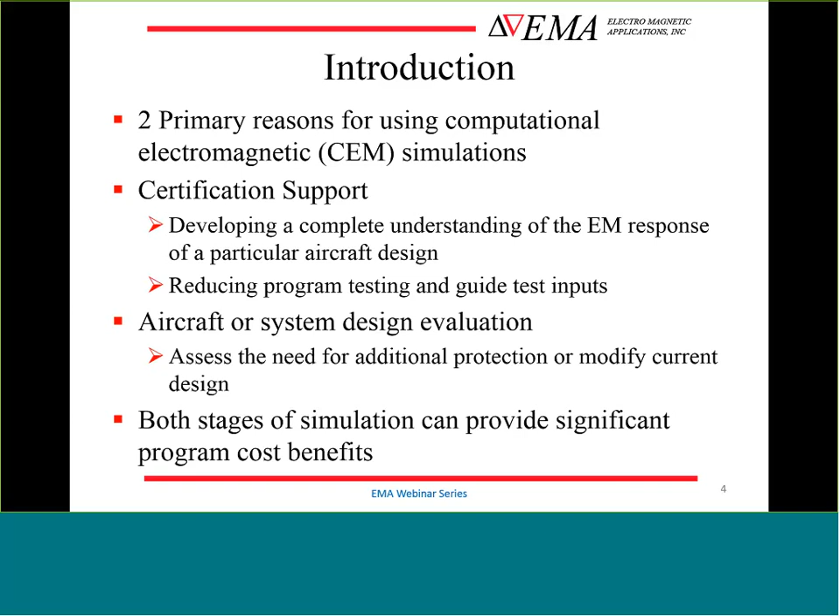So when we talk about lightning effects, it's typically broken up into two categories, either direct effects or indirect effects. Direct effects relate directly to the physical damage of the vehicle or system, and it's often verified by representative coupon tests. The items included in direct effects are the melting or burning of attachment points, resistive temperature rise, magnetic force effects, acoustic shock waves, arcing and sparking at bonds, hinges, or joints, and the ignition of vapors within fuel tanks.

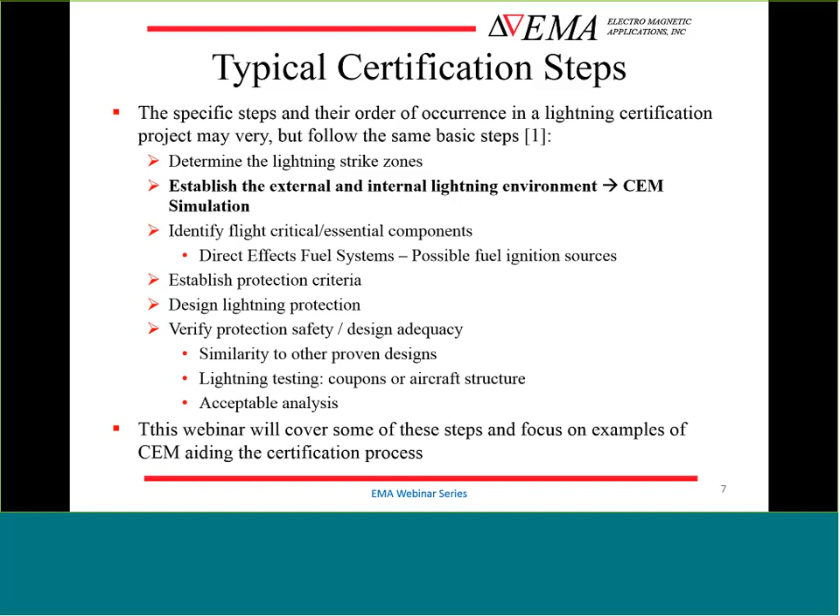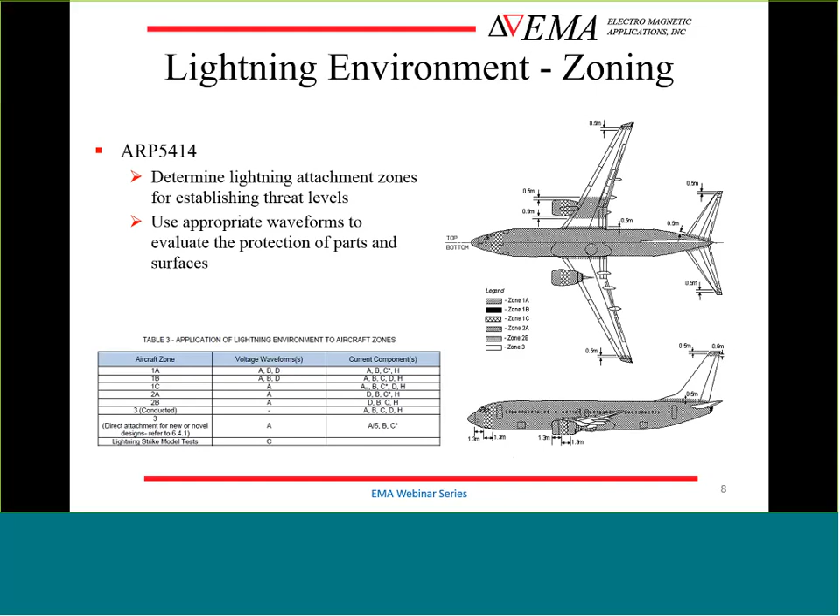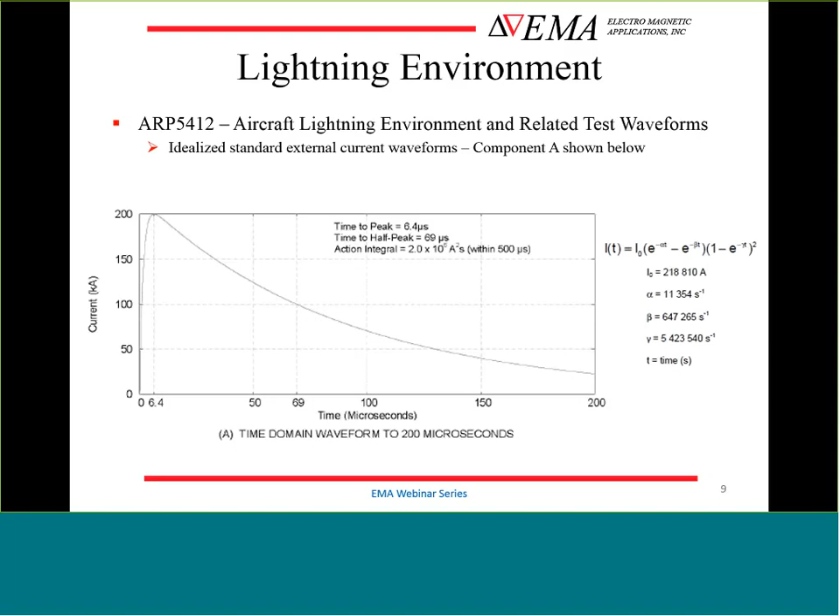So when doing computations, there are many different simulation techniques and many different software tools available. The IEEE standard 1597.2 is a very good reference. It has sections that discuss all of these different simulation techniques as well as many others, and helps guide you on which simulation technique is appropriate for your particular problem, as you would want to use a particular technique depending on the problem that you're trying to solve.

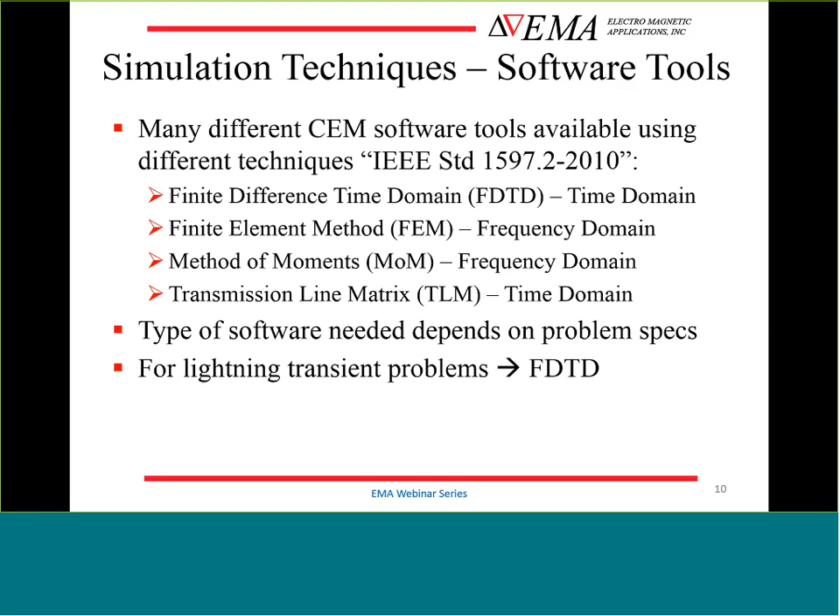And it turns out for lightning transient problems that the finite difference time domain technique is well suited for that. What we use is EMA3D, which is the software that we have maintained for the last 30 years. It is very mature and very well suited to solve lightning interaction problems for complex and inhomogeneous aerospace applications.

Some of the benefits are that it can capture the electromagnetic details of an entire aerospace or ground system down to individual electronic interfaces. We can resolve pin details for full aircrafts or large ground systems, and we do that with an integrated MHARNESS program. It is a transmission line solver that we co-simulate with our 3D model, and we do that to accurately capture the individual pins at the interface level.

This EMA3D also has some very valuable computational speed-up techniques. Parallel processing is available both on Windows and Linux machines, and we have a permittivity scaling feature that we can increase the permittivity in a problem space in a gradual manner so that it does not perturb the solutions of lightning transients. When we combine these two speed-up techniques, we can get factors of up to 100 times for our simulations, which in the case of lightning, when you have large-scale problems and you need to run them out for a relatively long time, hundreds of microseconds, this speed-up is of great benefit.

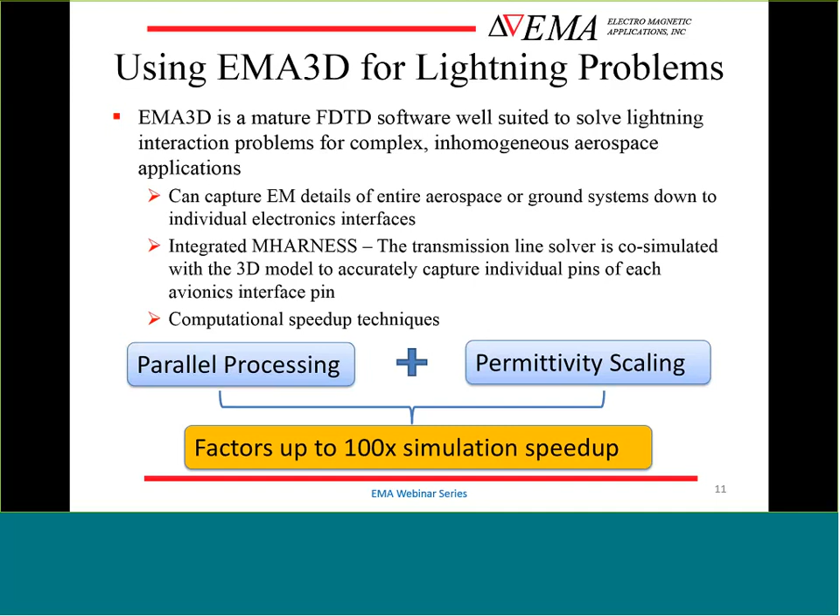So in that IEEE standard, there are discussions about CEM validation techniques. If you read through that document, you'll find that there is no actual standard that specifically qualifies CEM simulations for lightning interaction problems. It has a lot of useful information, but it's more geared towards EMC applications, and it typically uses the feature selective validation, FSV approach, which requires a Fourier transform into the frequency domain, and it's not really well suited for lightning transient problems.

But there is an overall validation approach outlined in that document that does apply to lightning interaction problems, and that's where you have to go through three levels of model validation. Level 1 is the mathematical level, where you evaluate your computational technique: is the method I'm using, finite difference time domain, FEM, method of moments, whatever it is, correct? Step 2 is the implementation level: does the code or software I'm using accurately solve Maxwell's equations? Level 3 is the model level, where you do specific model validation. Are the parameters, assumptions, and setup for your particular problem appropriate to solve the intended problem?

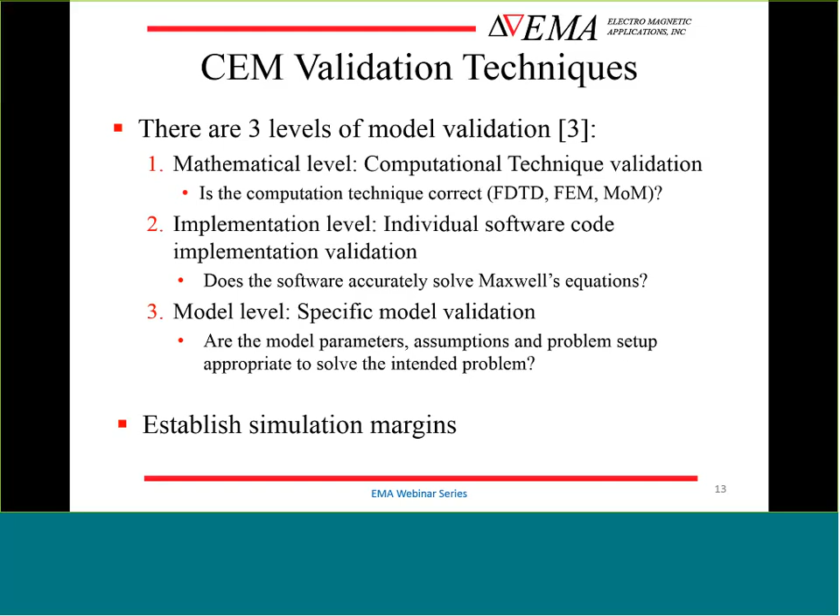You also have to establish margins associated with this validation. Anytime you do a validation, you'll need margins applied to your results as a sort of safety margin. Some approaches for validating CEM for lightning transients are, as we've done in this work and others have done elsewhere, to compare peak magnitudes in a dB scale and also look at the similarity of waveforms. This uses a peak magnitude comparison and a visual inspection of the waveforms for correlation purposes.

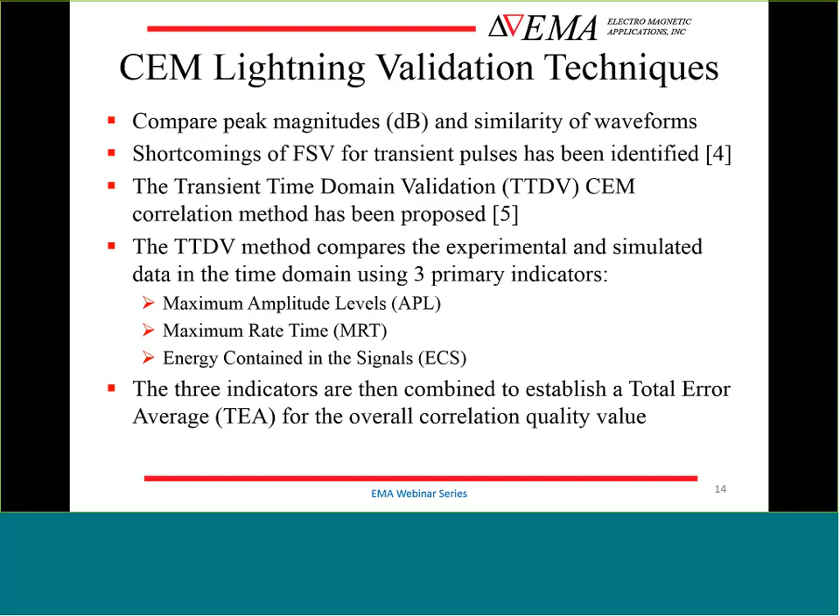There are some publications available that outline the shortcomings of the FSV method for transient pulses. If you're interested in those, you can contact me and I'll give you that information after the webinar. Basically, they propose a new validation technique called the transient time domain validation technique, and to me it seems like a very good approach. I have not yet tried it, but it's an interesting alternative to just peak magnitude comparison or the FSV method. It compares the experimental and simulated data in the time domain, using three primary indicators: the maximum amplitude level, the maximum rate time, and the energy contained in the signals. The approach combines these three indicators to establish a total error average to get a quantifiable value to evaluate your overall validation.

So margin development is a very important part of the validation process. With every effort, you must validate or determine the accuracy of your simulations, and oftentimes this is done through an experimental comparison.

Important to keep in mind, especially for lightning problems, that it may be difficult to apply a single margin to simulation results for an entire aircraft. Sometimes the probe correlation will depend on the magnitude and coupling mechanism of that particular probe. If you're looking at different areas, you may have different coupling mechanisms. If you have wires routed on the trailing edge side of your aircraft, you may have inductive coupling when your control surfaces, flaps are down and spoilers are up. Magnetic fields can directly couple into those cables, and you may have a dominant inductive or magnetic field coupling. If you have wires inside your leading edge or pipes inside your fuel tank, diffusion or resistive distribution may be the dominant levels. So depending on the type of probe and the dominant coupling mechanism, you can get very different correlations between your simulations and experiment.

When you're looking at fields on the outside of your vehicle, you can typically get very good accuracy with your simulations, often within 3 dB of an experimental measurement. When you look at currents inside metallic structures, like inside a leading edge, these magnitudes can be very small, often less than 0.1% of your injected current, and you can have differences between your simulation and experiment greater than 10 dB. But in these cases, you can still consider that a good correlation because the simulation is predicting small currents at those locations, even though the exact amplitudes and waveforms may have some discrepancies.

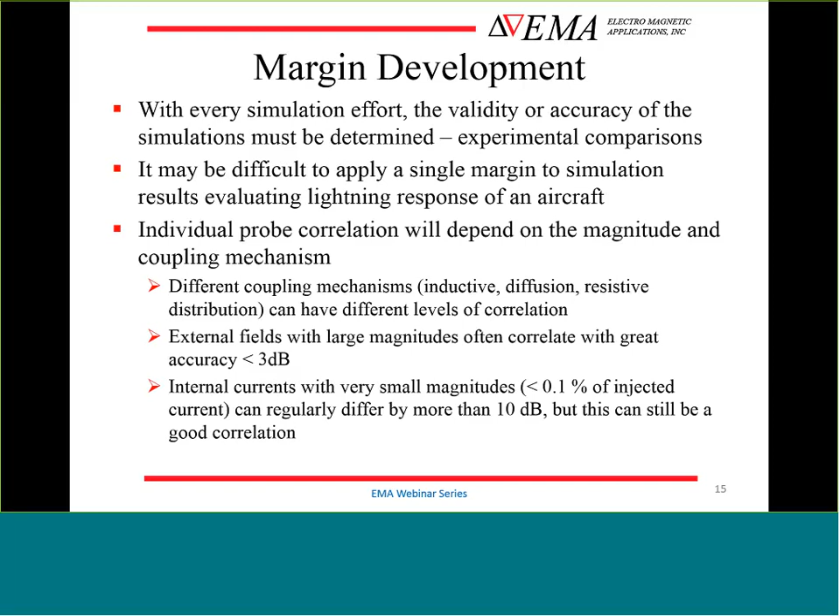One important note in the IEEE standard for CEM validation is some comments about experimental data. Oftentimes the repeatability and accuracy of measurements are very important. It's important to keep in mind that for EMI or EMC problems, measurements can have uncertainties as well, and that experiments can be wrong just like simulations can be wrong. It's necessary to avoid what they call a measurement bias.

In my experience, it seems to work best for the validation and analysis effort when testing and simulation are used together to understand all aspects of the lightning coupling to your particular vehicle. There are things you can quantify experimentally that you can use in your simulation inputs, and things you can understand in your simulation that can help guide your testing program. That's an important aspect to keep in mind.

One example of margin development for a recent certification project is for the A350. In that program, they used an extensive amount of finite difference time domain simulations to evaluate conducted currents throughout the structure of the A350, and they applied safety margins to these simulations based on a sliding scale depending on the current level. This publication was released at the most recent ICOLSE conference in Toulouse, France.

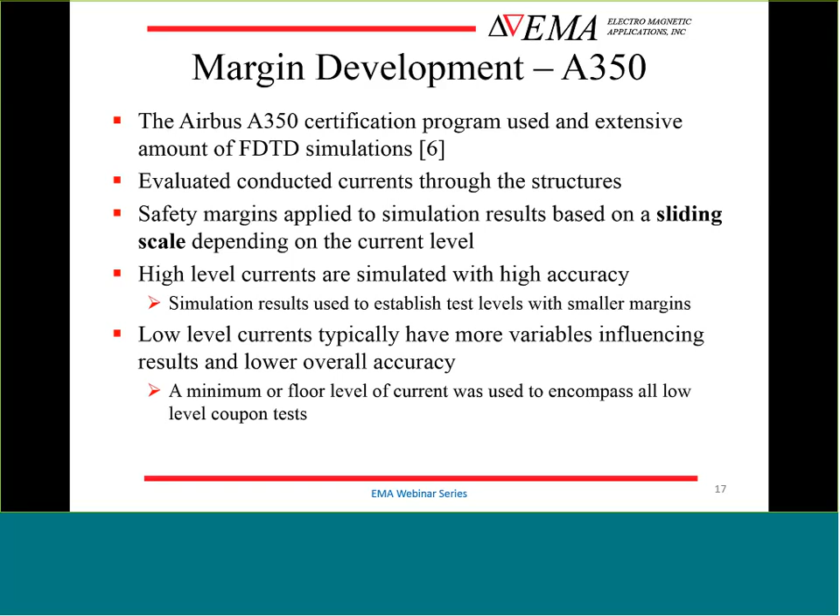Now we'll move on to some examples of where CEM has been used in certification projects.

EMA3D was used on one of the first composite fuel tanks, for the Saab Gripen fighter. The image shown on the right is a wing box test box, with carbon fiber upper and lower skins. The results of this analysis are published in both ARP 5415, which covers indirect effects of lightning, and in the Lightning Protection of Aircraft book. For this case they did a peak magnitudes comparison, and some of those results are shown in the table on the lower left-hand side. Overall, you see very similar magnitudes between the measured and calculated values.

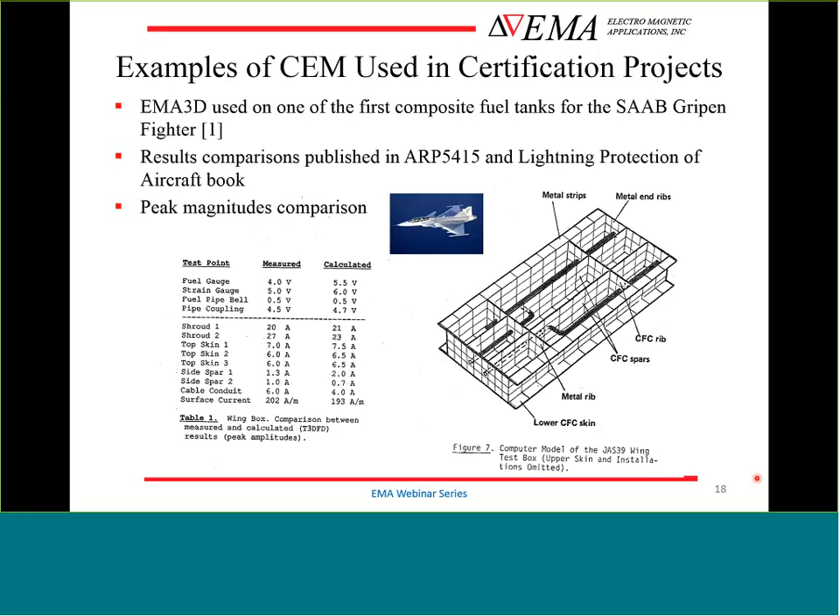Another example is the MD80 program, where they used simulations compared to test data to help certify the MD90 by simulation. There was a lot of similarity between the two designs, so they were able to use a lot of simulation to bypass testing, using a combination of similarity and analysis to go through their certification process.

You can see a sample waveform in the lower left, and in the lower right table you can see some of the ranges for variation from measured values. So they were getting comparisons between simulation and experiment, typically within 15%.

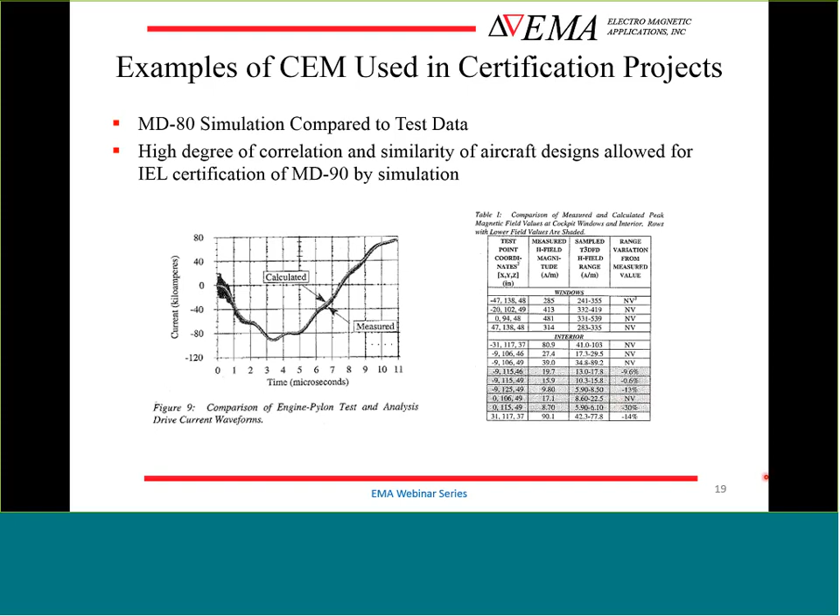A more recent example is for the Mitsubishi Regional Jet. They have been using EMA3D, and published results for a test box, an aluminum wing test box, with a dramatic successful correlation between experiment and simulation for many probes. Within that publication, they show results displayed here as surface magnetic fields at locations P1 and P2, showing very good correlation between the simulated and experimental values. This is in line with what we have said before about accuracy of simulation for external fields - it's typically very, very good at predicting external fields.

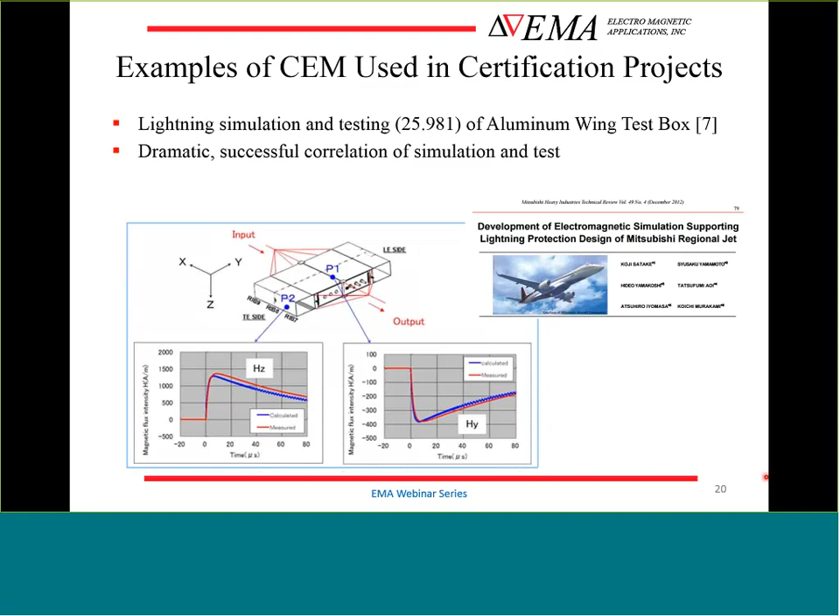Now we are ready to move on to the primary topic of this webinar, the recent validations in an aircraft certification program. It was an experimental lightning program conducted on an aircraft wing test box, similar to the other two test boxes we've reviewed so far, but also simulations and experiments were performed on a full commercial aircraft that was primarily composed of CFRP materials for the wings.

EMA3D was used for all of the simulations. Comparisons were made between these results to validate the numerical techniques and parameters, and in general we see an excellent overall comparison in both magnitudes and wave shapes, which we will go through in some detail. These results for both the test box case and the full aircraft comparisons were presented at this year's International Conference on Lightning and Static Electricity, the ICOLSE conference in Toulouse, France.

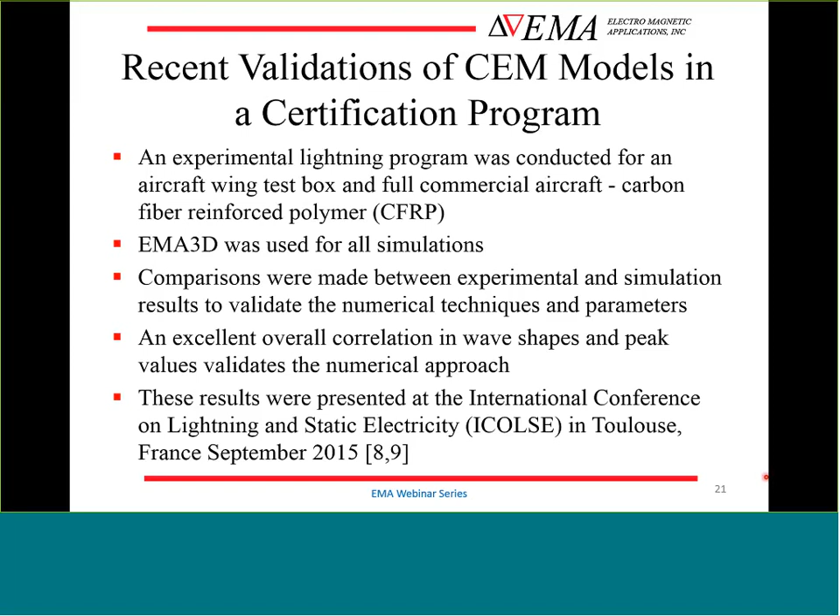So this was outlined earlier, but we'll walk through it again. It's important to set up a plan for incorporating your simulations into your certification program. It's best to establish this plan early and account for necessary validations of your simulations. In this particular program, it was very useful to have engineering development tests, which we'll talk about shortly.

We have done test and simulation on a wingbox, which seems to be fairly common practice between different certification programs, using an intermediate item of intermediate complexity between panel testing or full structure testing. We'll go through the test and simulation of the full aircraft, and talk about how simulations are used after you have a validated model, and how these are done for the final in-flight aircraft. This is used to establish your coupon threat levels, and then we'll briefly discuss coupon testing.

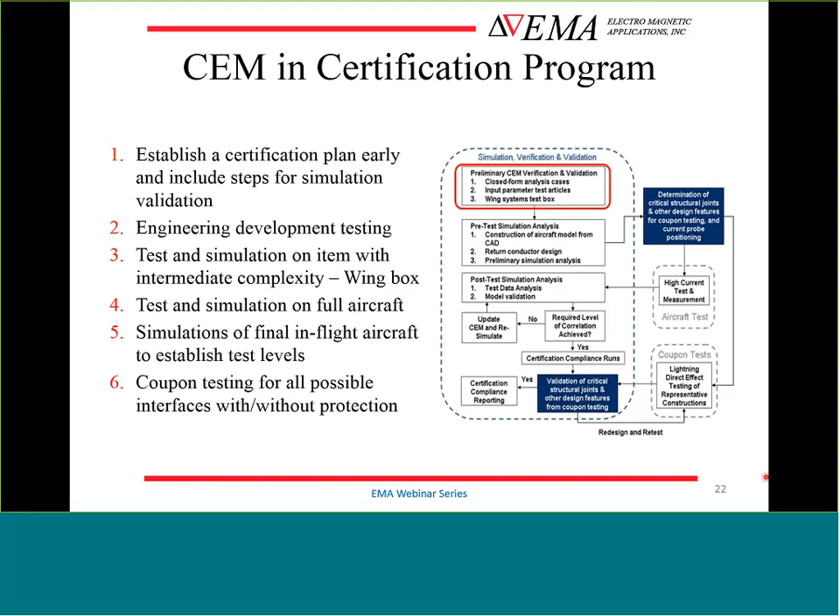So the initial aspect of this, there's numbering associated with these different steps, and the numbers are correlated here for the titles. One of the initial steps is to do some engineering development tests and simulations. For this particular program, a large number of samples were investigated, and we used those samples to identify many critical modeling features that we would incorporate into both the wing test box and full aircraft models.

Some of those critical features include the conductivities of CFRP and ECF. They are anisotropic by nature, both CFRP and ECF, and we used an extensive number of samples to test and then simulate, to compare and understand what conductivities are necessary to accurately simulate current distribution on the particular CFRP and ECF panels in this design. This was done for bare CFRP, plain ECF, and the combination of CFRP with multiple grades of ECF.

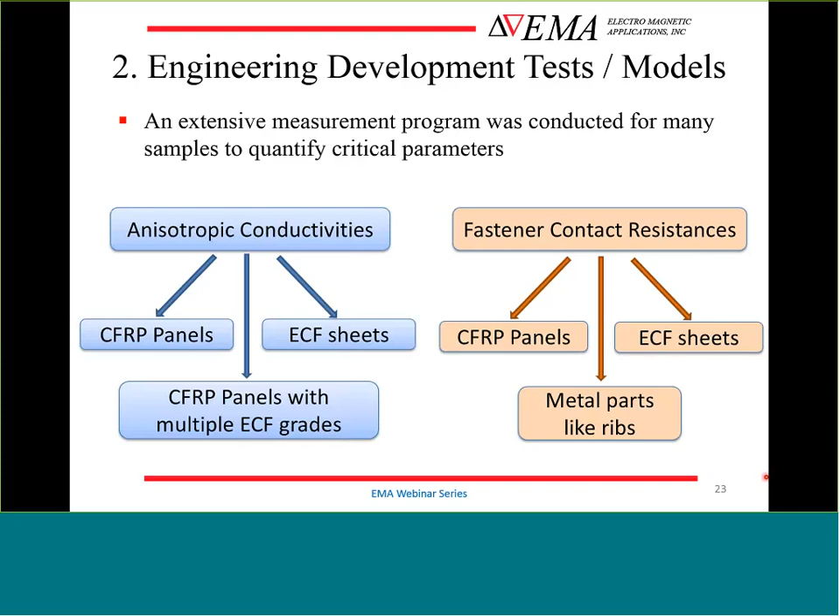Another critical modeling feature is the contact resistance of fasteners. In the models we put together for this project, we consider the contribution of every fastener to the current distribution. Oftentimes they are combined to form parallel resistances, and we incorporate that into the models. To determine accurate values, an extensive number of samples were tested, looking at the contact resistance between CFRP panels and fasteners, fasteners in ECF, and fasteners to metal-like components, be it titanium or aluminum depending on the area. As you might expect, there's a wide range of contact resistances depending on the fastener types, installation techniques, and the materials they're connecting to.

So here's an example of a modeling technique established based on some of these initial engineering development tests. Carbon fiber panels are typically a stack of individual carbon plies. These plies are often separated by tens of micrometers, and you stack them one on top of the other to get several millimeters thickness of carbon, depending on your application. When using finite difference time domain technique, you cannot resolve the individual layers of the carbon, especially when using something like a 20 millimeter mesh.

So we developed a technique where we take a stack, illustrated on the left-hand side as the actual configuration. This is representative of a heavy ECF layer, a light ECF layer, and many different CFRP layers, all stacked together, penetrated by a fastener which connects to some structure beneath that panel, be it the metallic rib or composite spar. The technique we use for this configuration is shown on the right-hand side, where we reduce that entire stack of materials into a single representative surface that we can apply anisotropic or isotropic properties to, to represent the entire stack of materials.

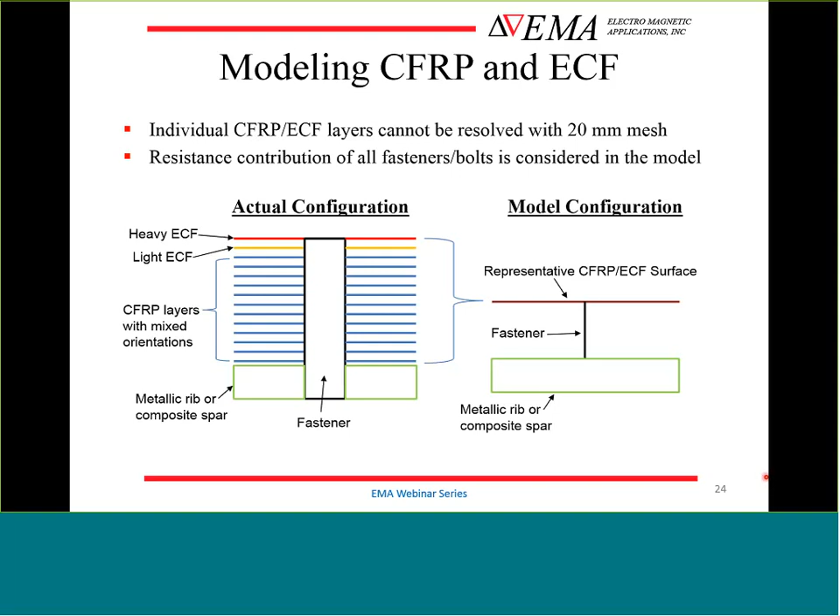So a very important aspect of modeling or understanding vehicles with carbon fiber is that, as we've already said, the carbon fiber is anisotropic by nature. When modeling simple panels, or a test box that aligns very well with the principal coordinate axes, it's quite easy to apply anisotropic properties to those. But it is very difficult to apply anisotropic materials to a complex curvature, such as occurs in real aircraft wings, based on the staircasing, skewed orientation with three principal axes, and curvature. It's not straightforward or simple to apply anisotropic materials.

So one of the goals of this effort is to use the test box to evaluate numerically whether or not isotropic surfaces can be used for the full aircraft. Two different models were created for this test box: one that uses anisotropic representations for all of the CFRP and ECF materials, reflective of the actual material properties, and then another to see if we could use an isotropic representation, where we average values or do some weighted average to estimate isotropic behavior of those materials.

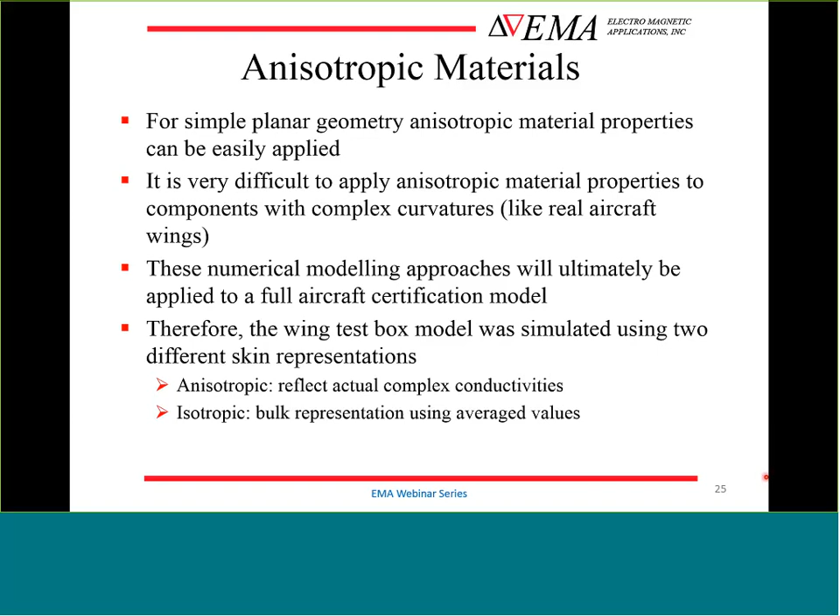So now we're on to the test box model. It is a representative section of the actual aircraft wing. It contains 5 rib bays, as you can see on the right. It was constructed by Bombardier using production-type materials and construction methods.

The skins and spars are of CFRP material, and multiple grades of ECF were used in the design. There are access panels on the lower side, which is typical for aircraft maintenance and wings. Two types of systems were installed in a representative manner: there were 2 cable bundles that each had 5 wires, routed throughout the different rib bays, and 1 hydraulic pipe was routed through the center of the box.

To try and represent some of the metallic features associated or connected to the composite structure, they have a metallic leading edge provided here, and there's also a strip of metal provided along the trailing edge, which they call the lightning diverter strip, mounted to this trailing edge spar along this location.

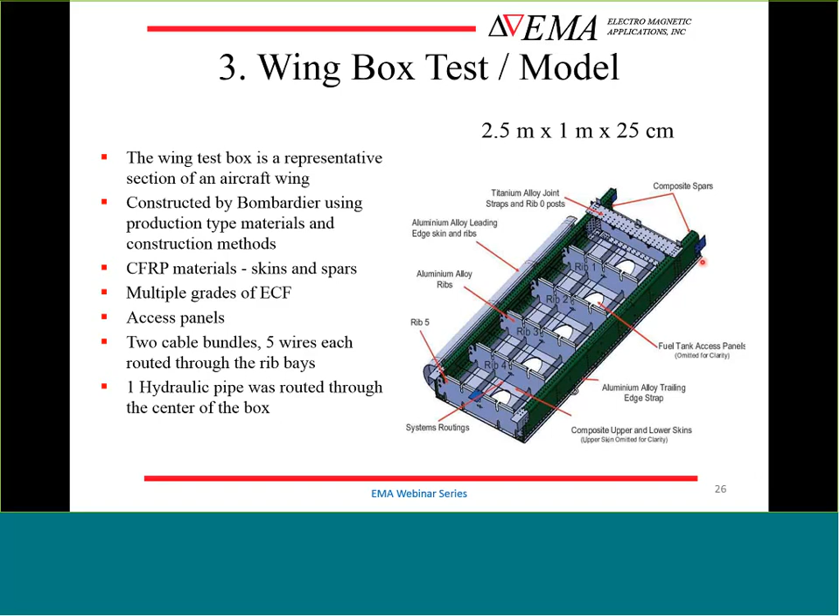Within the model we used MHARNESS to represent the wire bundles. We are able to include termination resistances and resolve the individual conductors by using MHARNESS. And 2 different configurations were explored.

One configuration looked at current measurements on these wires so that both ends of the wires were connected to structure, and another examined voltage measurements, so the wires were left connected at one end and open at the other end to measure a voltage between the end of that wire and a nearby rib.

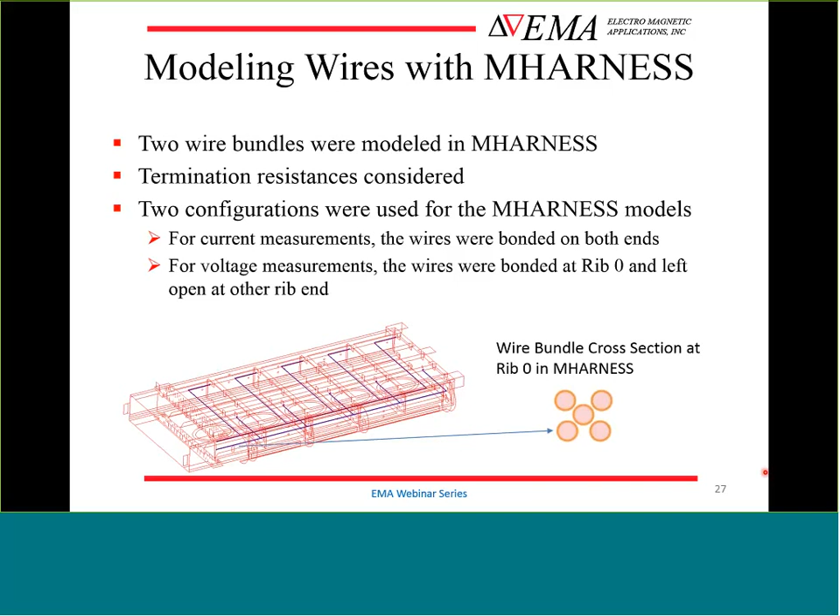For the experimental setup, a return conductor system, an RCS, comprising metal sheets, was built around the test box to negate facility effects, and a component A type waveform was used for injection purposes. The amplitudes ranged from 2.6 to 10.4 kiloamps.

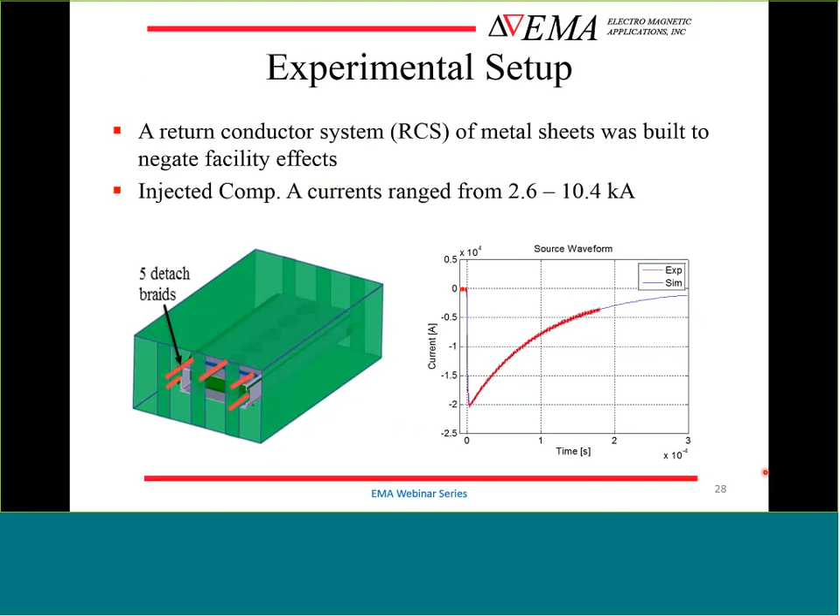There was a case where current was injected onto the upper trailing edge side of the box and detached through the middle leading edge side, creating a different current distribution pattern where current had to make its way across the carbon fiber ECF panels in order to get to the exit point.

There were also 2 fastener injection cases explored at 2 different fasteners on the lower end of the test box, with a distributed detach for both of those cases.

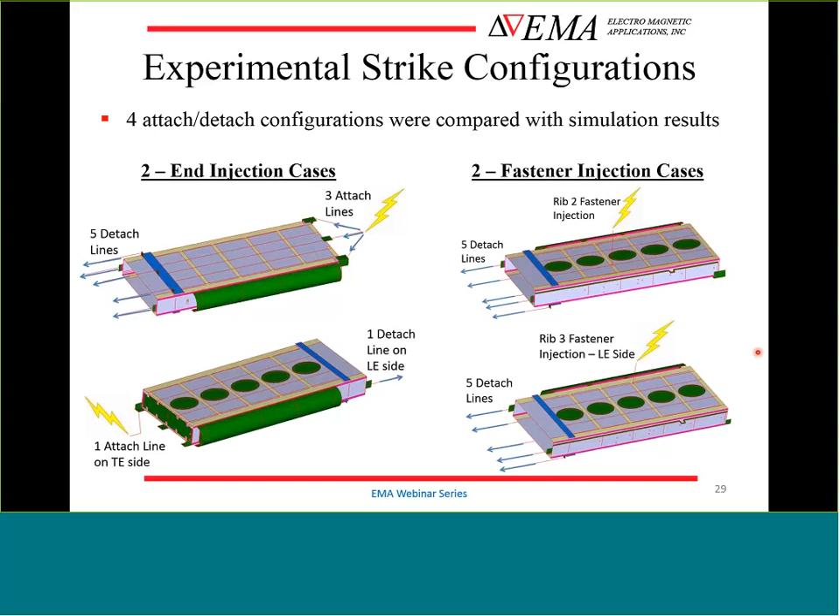So now we're going to look at some of the results and validation that was done. We approached it with a direct comparison correlation technique, where we do a comparison of the peak amplitudes of the waveforms and an inspection of the waveform shapes.

We did some comparisons of T1 and T2, where T1 is the time that the peak magnitude occurs, and T2 is the time where the waveform is at half of that peak value.

In order to compare all of the results, we scaled the values to 20 kiloamps. You saw before that the injections ranged from 2 to 10 kiloamps. In order to compare them, we scaled all of the results to 20 kiloamps, and some of the margins can be established in this way by looking at a scatterplot comparison, which we have on the following slide.

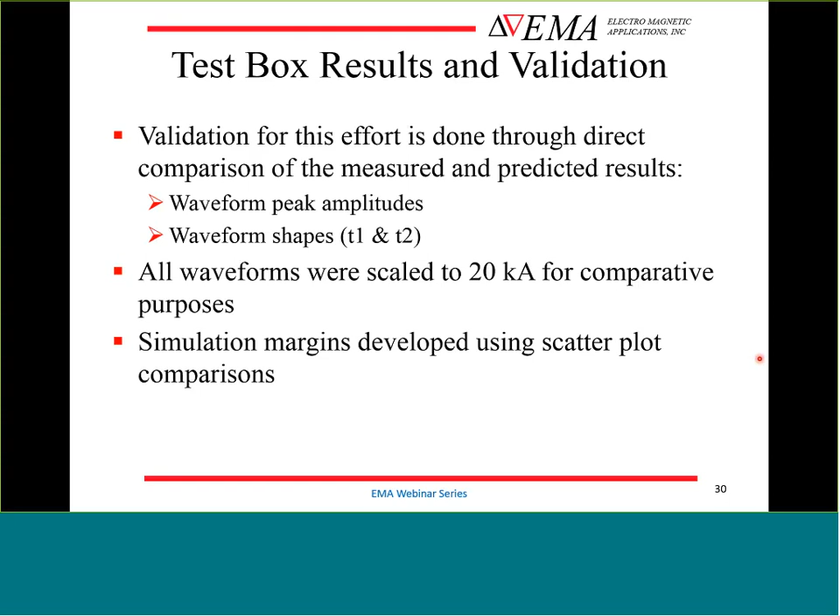80% of the peak values are within 3 dB of the experimental counterpart, which is, in my opinion, astounding. And 95% of the peak values are within 6 dB of their experimental counterpart. So for 150 total probes, we see this type of correlation for currents on the test box.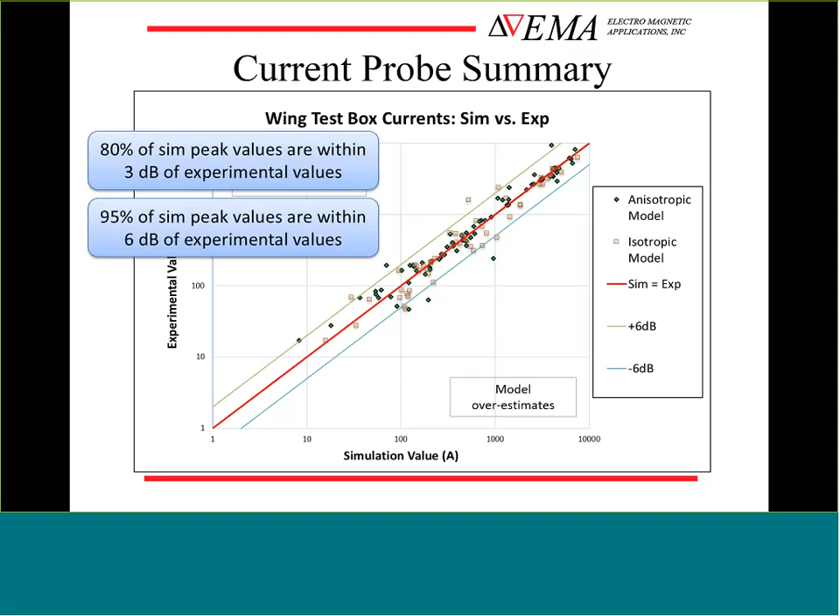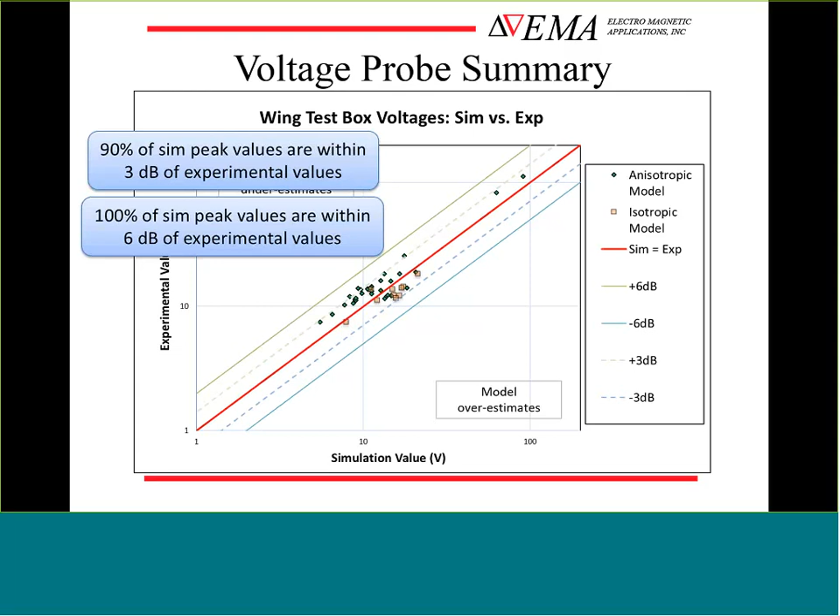When we look at voltages, there were 40 total data points, same type of plot, but here we've also added plus or minus 3 dB lines because of the good correlation between simulated and experimental values. 90% of the data points are within 3 dB of their experimental values, and all voltages are within 6 dB between simulation and experiment.

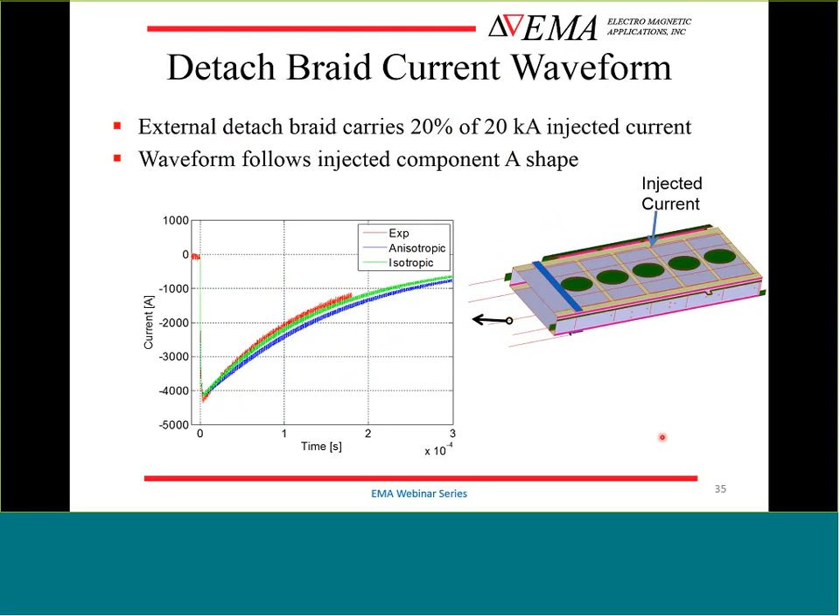This is an external current, for a fastener injection case, current was measured on one of the detached braids. Here we show the experimental curve in red, the anisotropic simulation result in blue, and the isotropic model result in green. You see an excellent comparison in both amplitude and wave shape.

Here is a section of rib just below the injection location. One benefit of doing a test box experiment and simulation is that you can modify the geometry to suit your exploration needs. In this case, they drilled holes in different sections of the rib so they could put Rogowski coils around those sections and determine how the current would distribute through the rib as it passed through.

Again, for the waveform and amplitude comparison, you see very good correlation with both the isotropic and anisotropic models. This particular result is an order of magnitude down from the exterior one, where you saw 4,000 amps, here you see 400 amps for this probe. So you see more discrepancy in the simulation-to-experiment comparison, but still very good overall prediction.

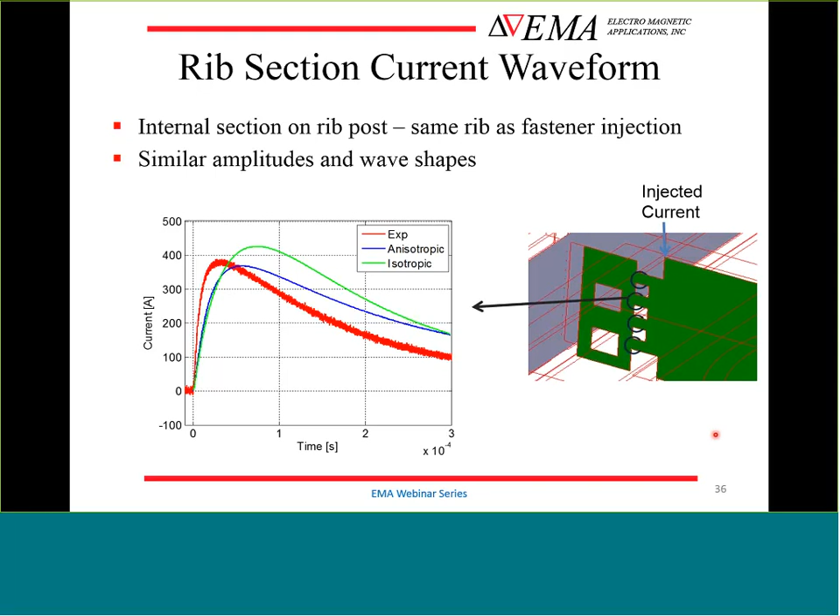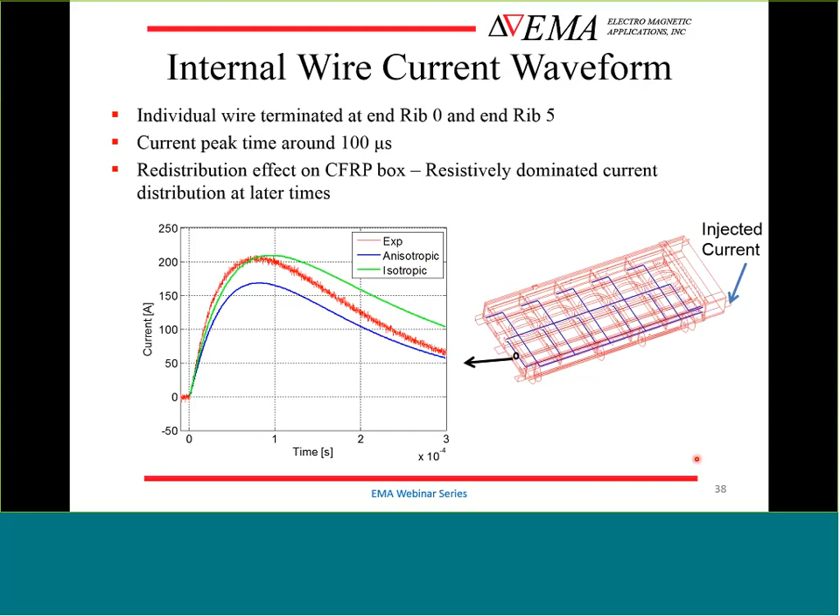Then if we switch to an internal wire, we see the converse effect, where at early times the current is very low, but it continually ramps up to a point where the system is under resistive distribution dominance. The peak of the internal wire occurs around 100 microseconds, which is very common in CFRP-like structures. For this particular case, again we see very good correlation between the experimental and simulated results.

In conclusion, for the test box validation, we see excellent overall correlation between the EMA3D simulation results and the experimental results. Considering 200 total probes of current or voltage, 80% are within 3 dB and 95% are within 6 dB. We notice in the different waveform examples very good correlation whether we use the isotropic or anisotropic material representation. This gives confidence that you can apply the isotropic representation to the full-scale aircraft, which was one of the goals from the beginning.

So now we'll move on to the full aircraft test and simulation. The exact same modeling techniques and parameters that were used for the test box are applied to this full-scale aircraft model. Part of the reason for doing the test box and engineering development test is that you establish what materials should be applied, and that approach was taken and followed.

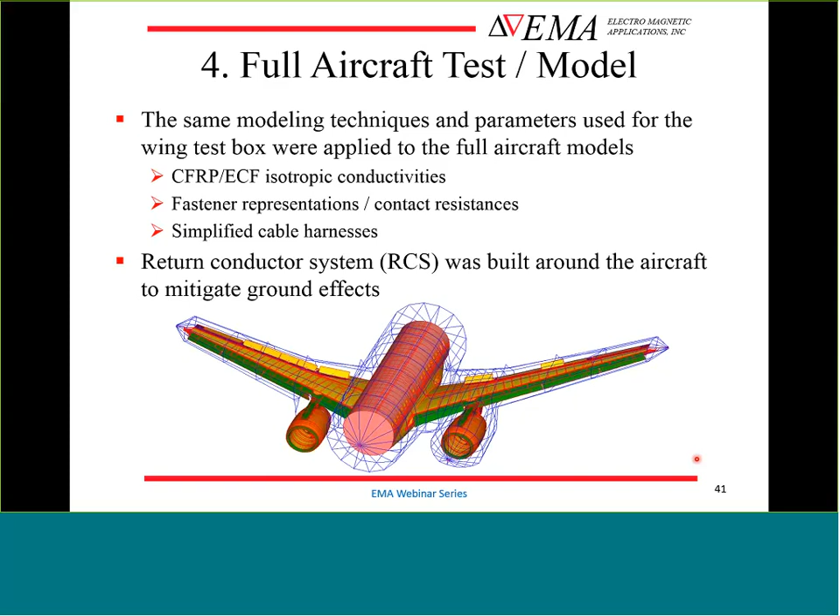A modified component A waveform was used, and 3 different attach-detach scenarios were considered, both for testing and for simulation, with the amplitudes ranging from 3 to 15 kiloamps.

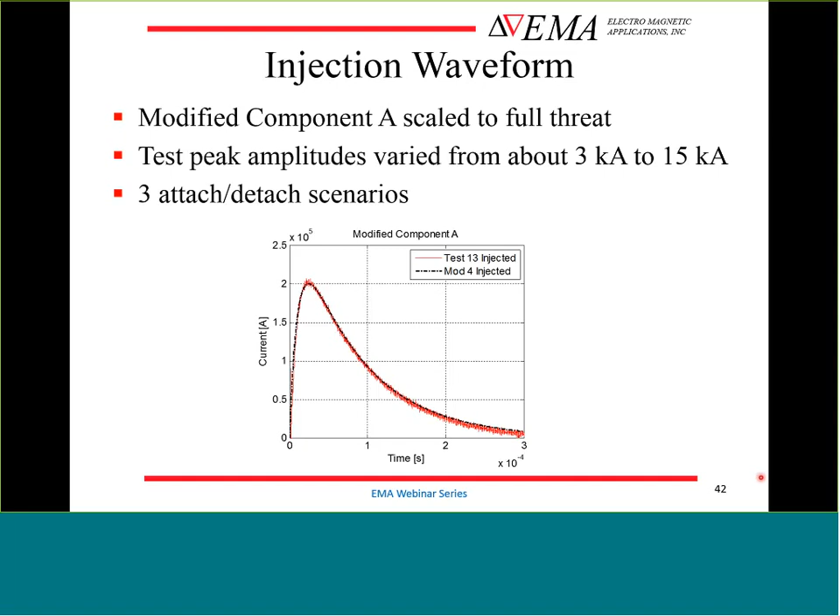One thing you'll notice is that these waveforms are a bit slower in their peak time, whereas the test box and idealized component A waveforms peak around 6 microseconds. Because of the inductance associated with the full aircraft and the entire system, there's some delay on that peak rise time, and so you'll see typically these injection waveforms have T1s of about 20 microseconds or so.

So for the full aircraft results and validation, a similar approach was taken as to that of the test box. We look at waveform peak amplitudes and do a dB comparison, and then also look at waveform shapes, T1s and T2s, to do a visual inspection.

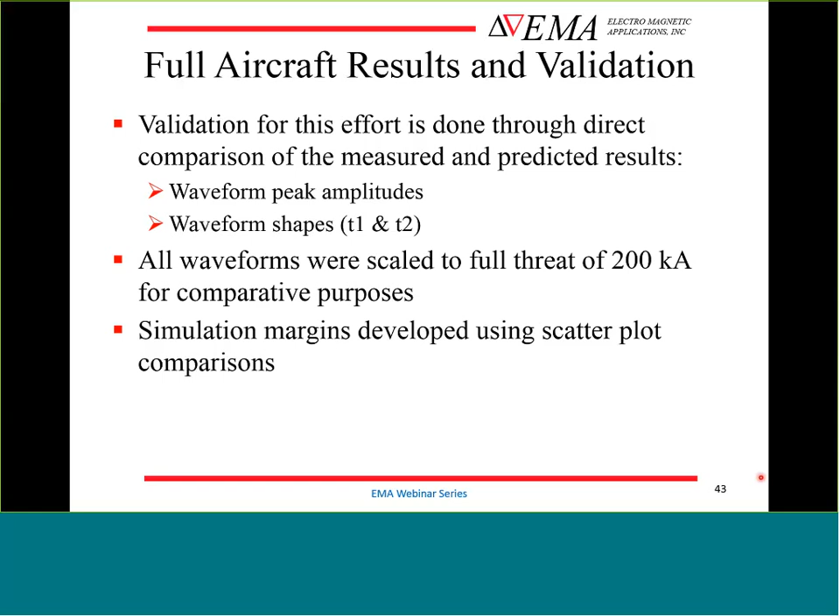All of these results have been scaled to 200 kiloamps for comparative purposes, and again, margins have been developed using these dB peak comparisons and specifically the scatter plots showing those comparisons.

So now we'll look at the same types of scatter plots for the current, voltage, and magnetic field results of this full aircraft test and simulation.

This is exactly the same kind of plot that was shown for the test box, where the experimental value is provided on the y-axis, the simulation value is provided on the x-axis, and the blue diamonds are the data points. Plus or minus 6 dB lines are provided to help illustrate the accuracy of the results.

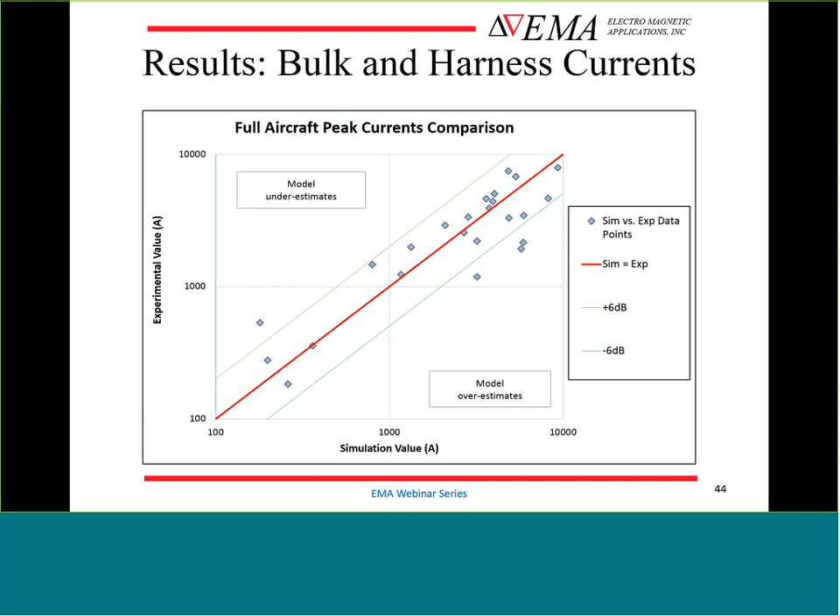So here are the results for the surface magnetic fields, same type of plot, and this is using BDOT sensors along different areas of the external surfaces. We see in this case that all of the results fall within the plus or minus 6 dB margin.

As we've said a couple times throughout this presentation, it's typically with better accuracy that external fields and currents are predicted with simulation, and these surface magnetic fields help to illustrate that point.

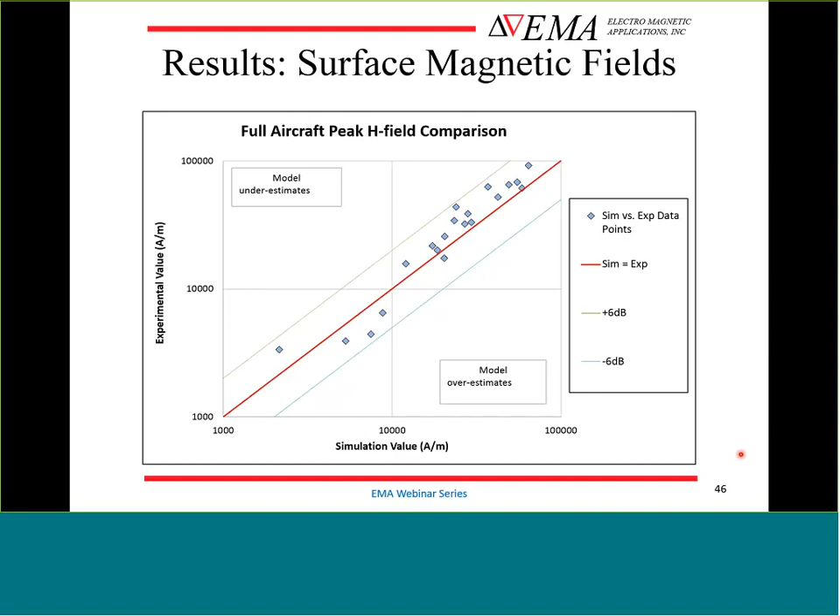Here are some comparisons of the waveforms for the magnetic fields, with amplitudes on the order of 20,000 amps per meter. We see good correlation between the peak value and the waveform.

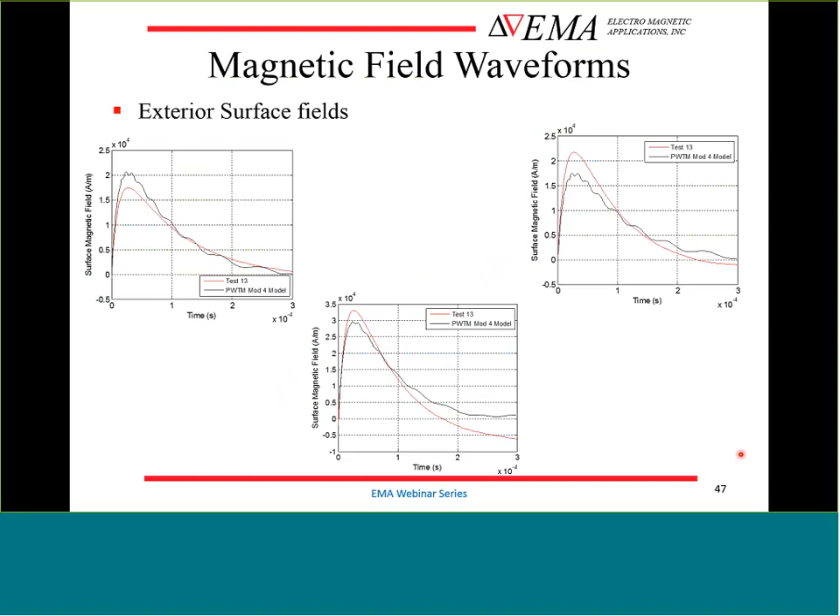Here are the results for voltages. You can see again the majority of the data points are within that 6 dB range, and for values that range from a few volts to a couple hundred volts, we see overall very good correlation between the simulated and experimental results.

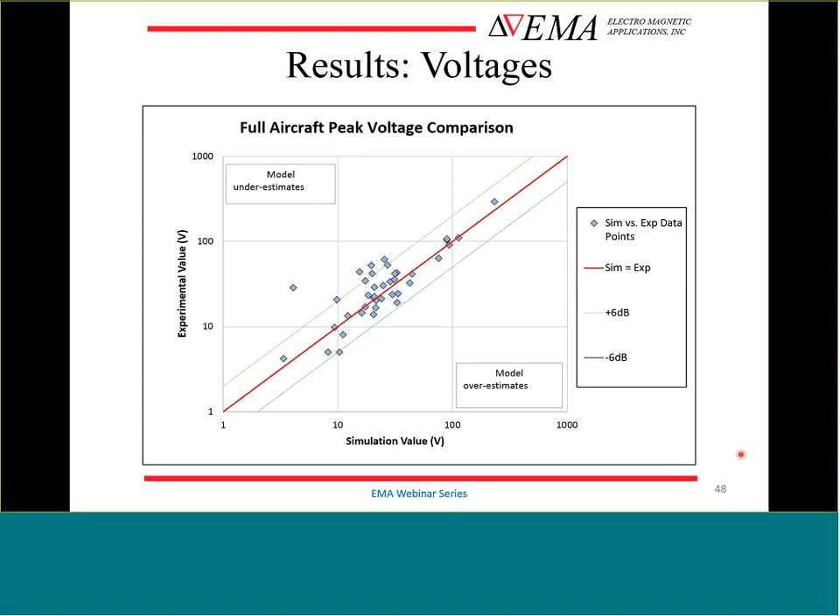Here are two examples of waveforms for the voltage probes. These are either for structural rib-to-rib voltages, where an artificial line was put in the aircraft to determine a rib-to-rib voltage, or to measure the voltage from an FQGS wire to a nearby structure. You can see that the voltage is much higher in the case of FQGS because it routes over a longer span within the wing.

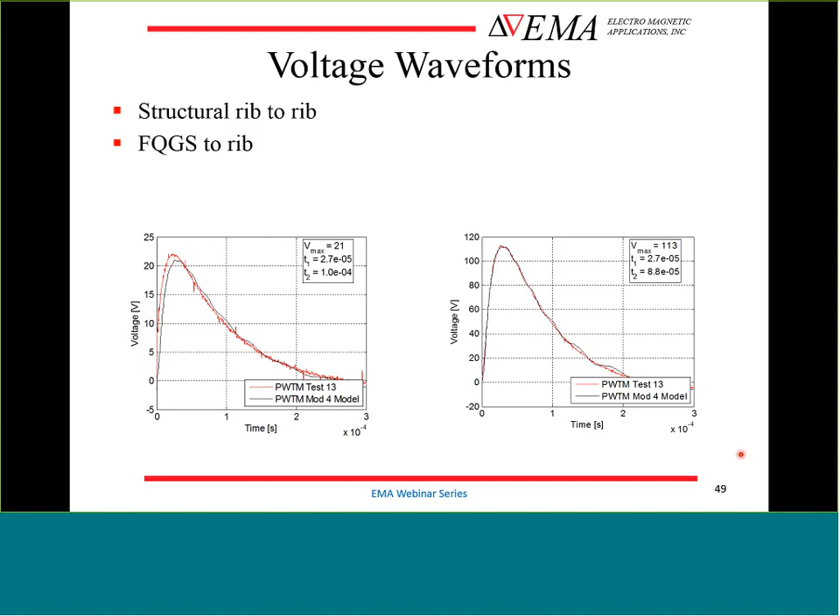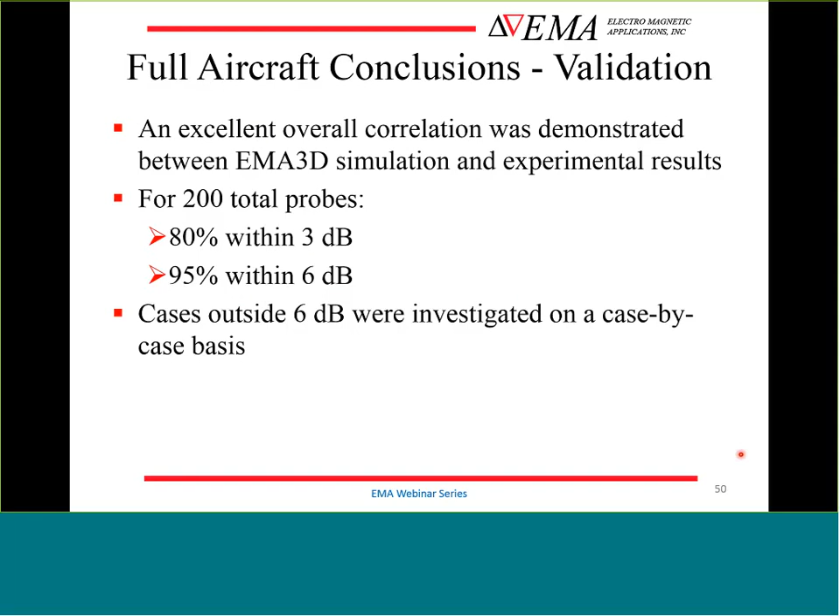So for the full aircraft validation, we see again an excellent overall correlation. For the 200 probes that were considered, 80% of the results are within 3 dB and 95% are within 6 dB. It was of special interest to consider why some of the results were outside of the 6 dB range, and we investigated these on a case-by-case basis, which we will talk about briefly now.

This was done because initially this was going to be a direct effects investigation, where we were concerned with currents and voltages in and around the fuel tanks specifically. But when the opportunity came up, they decided to add probes on the available harnesses to have a brief look at the indirect effects aspects.

It was discovered that this simple representation, using a bulk diameter and parallel resistance combination of those particular cables, was not adequate to accurately predict the amounts of currents and voltages that would couple to those harnesses. So what we did was go back and define much more detailed harnesses to represent the cables in the leading and trailing edge sections of this particular model.

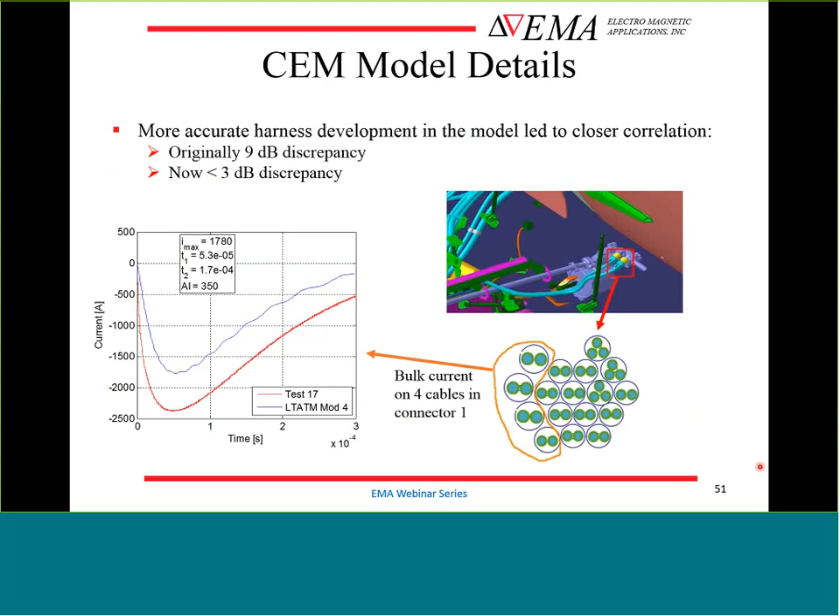When we did that, as you can imagine, there was drastically improved correlation between the simulation and experiment. Whereas we had on the order of 10 dB discrepancy before, it improved to less than 3 dB discrepancy.

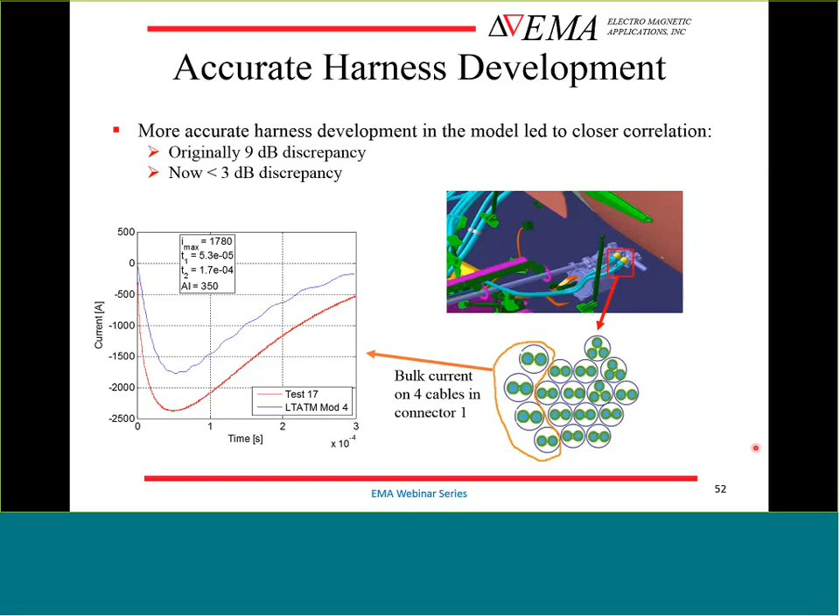With the resolution within the M harness model, we were able to select just a few of the conductors to probe. Consider these two harnesses connected at this location, with a branching just before that termination - a majority of the cables are in this fatter conductor, and just 4 of them were in this one. We're able to resolve that within M harness and measure just a small portion of those cables for bundle representation. You can see with that result there is a very good comparison between the simulated and experimental value.

So by updating the features of the harnesses, you're able to more accurately predict the currents and voltages that will flow on those harnesses and cables, which makes perfect sense.